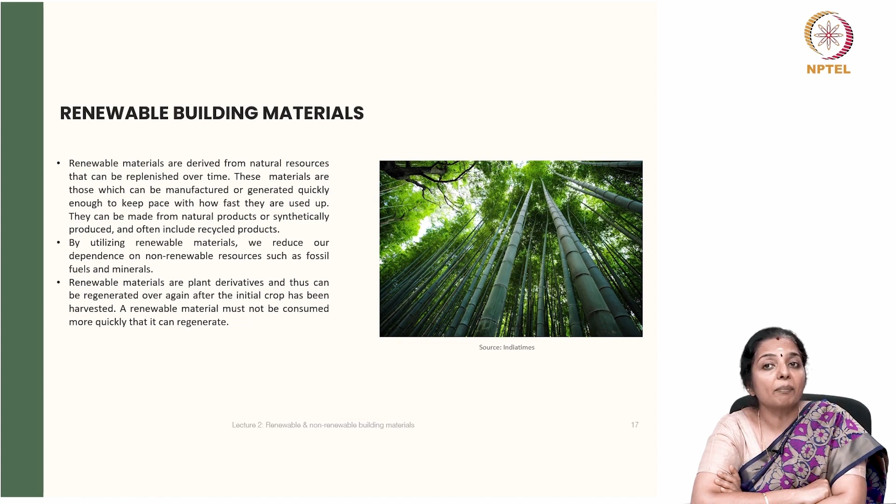Besides being composted in a short period without causing environmental harm, bagasse is used as a biofuel for producing energy and heat along with electricity. These multifaceted benefits pile up its demand in the market.

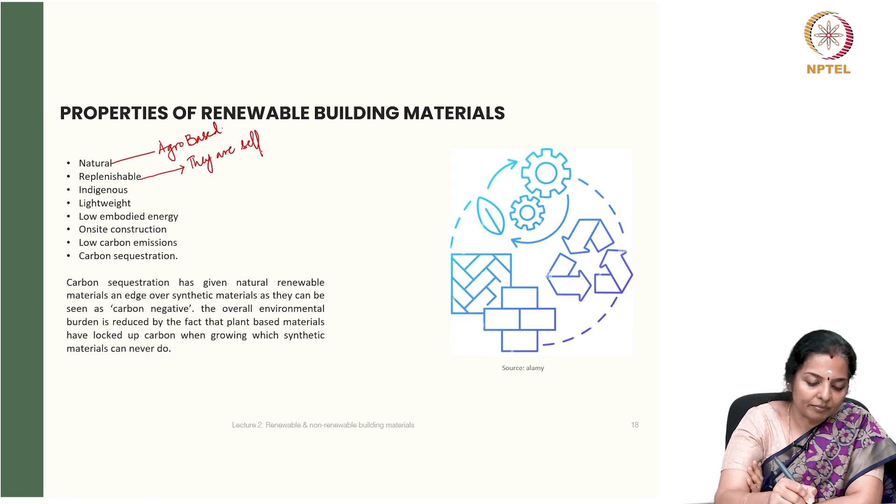Now we will again go through some of the properties of renewable building materials. Renewable materials are natural. Most of them are agro-based. So, they are agro-based most of the times, natural, found in abundance. They are replenishable. So, they are self-generating in a way. For example, bamboo. They are indigenous. So, they have local adaptation

because they are indigenous. They are lightweight because they are mostly made up of dry agro-based material, and they have low embodied energy because they are natural. They are fit for on-site and off-site construction. They have low carbon emissions because they are natural, and they have carbon sequestration again because they are natural products.

So, carbon sequestration has given natural renewable materials an edge over synthetic materials as they can be seen as carbon negative. The overall environmental burden is reduced by the fact that plant-based materials have locked up carbon when growing, which synthetic materials can never do.

Studies on the embodied energy consumption in buildings which have been carried out by UNCHS in the year 1991 have indicated that a high proportion of the energy used, almost up to 90%, is used in the production and transportation of building materials before they are brought to site. Only 10 to 20% of the energy use takes place in the on-site construction process. Thus, renewable materials which are natural have less embodied energy.

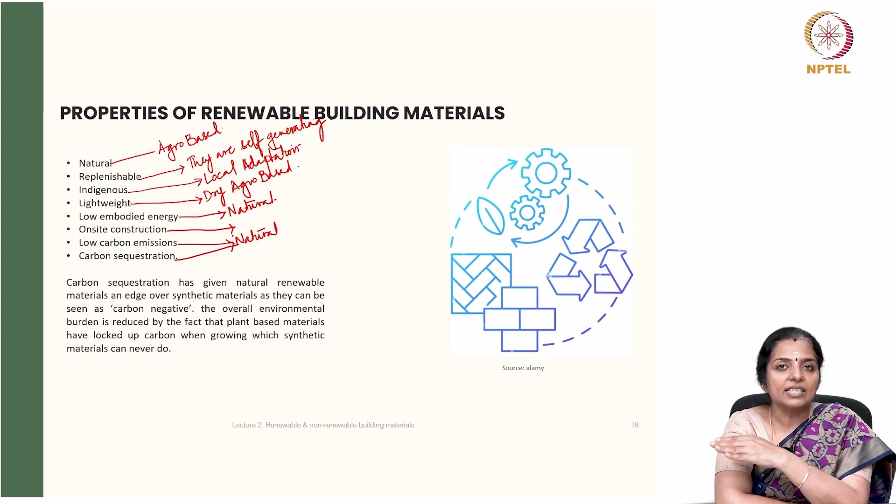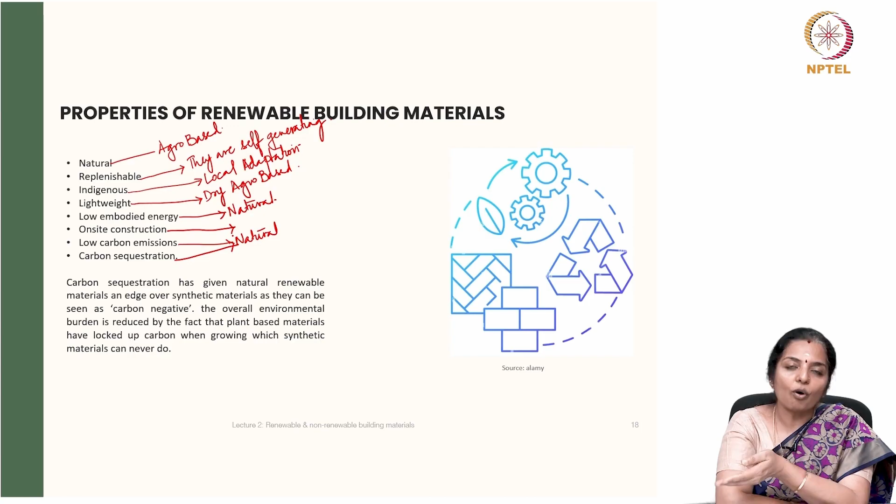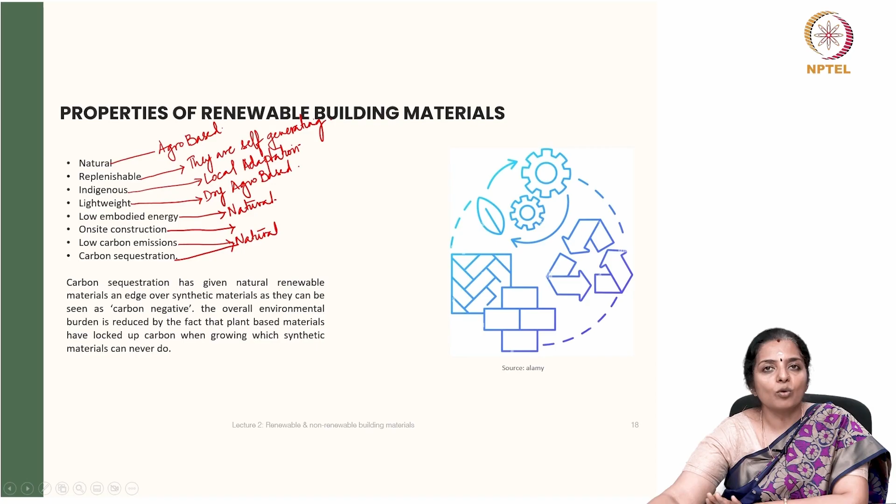In our case, we will also consider mud as a renewable building material since it is a natural material and there is no dearth of mud. If you look at the characteristics and properties of renewable material, mud follows almost all of these except for being, say, lightweight or self-generating. Except for that, it abides by most of the characteristics of renewable building material.

Now, encouraging adoption of renewable material is a very key component in decarbonizing buildings. Recent government regulations encourage adoption of renewable materials. In the mission to transform the construction industry into a sustainable sector, various renewable materials in the construction market have been identified, which hold the potential to replace the existing construction materials. The major objective here is to save energy, water and various non-renewable resources to gain and reap long-term benefits.

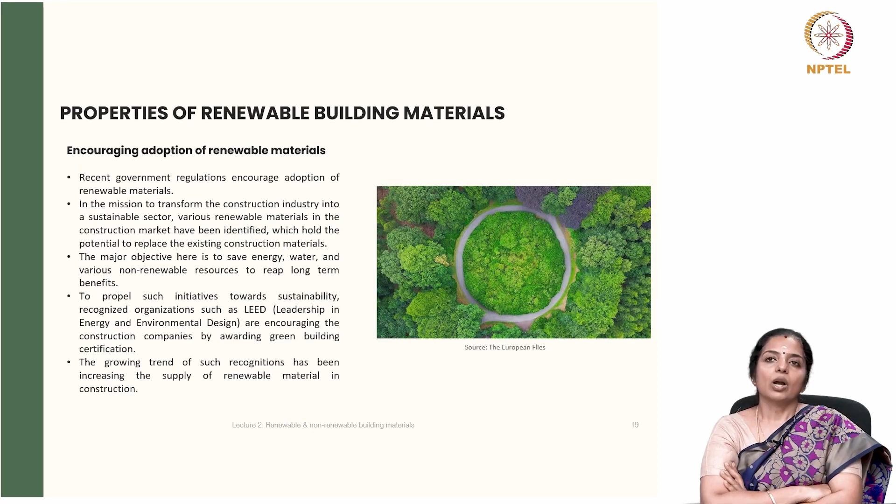In order to propel such initiatives leading to sustainability, recognized organizations such as LEED are encouraging the construction companies by awarding green building certification. Also, the CII, Confederation of Indian Industry, awards green certification to the products itself through GreenPro as an organization. The growing trend of such recognition has been increasing the supply of renewable materials in construction industry.

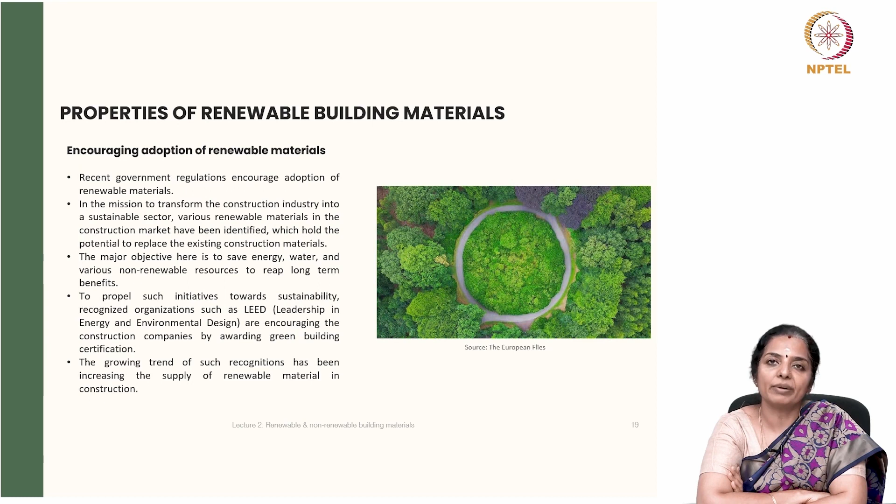Let us now look at a few of the materials and the construction technology which makes the combination of building material used with that particular technology to give rise to low carbon buildings. Let us look at burnt bricks. Now, if you look at burnt brick masonry, per meter cube, burnt brick masonry has 2 to 3.4 gigajoules of embodied energy. Whereas, if you look at composite blocks, it has half or less than half of the embodied energy which a burnt brick masonry possesses, because it has 1 to 1.35.

Burnt brick is manufactured by casting mud blocks and firing them in kilns using certain types of fuels. Sometimes the fuel is just straw, hay. It could be anything. Sometimes it is coal. It could be any of those, and that is what increases or decreases the embodied energy in burnt bricks. If we look at the embodied energy of stabilized mud block, it is almost 1/4 of that of burnt brick.

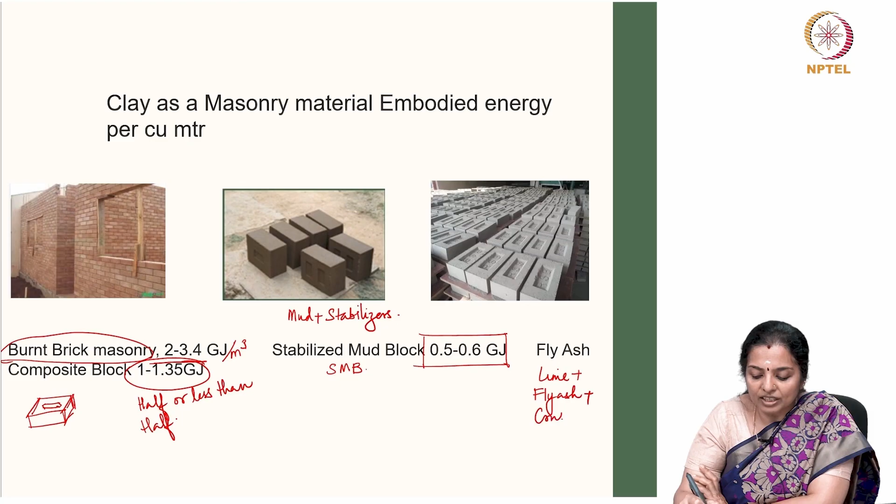Whereas fly ash blocks are a mixture of lime plus fly ash along with crusher dust. This is compacted into a high density block. Now, lime reacts with fly ash and the minerals in the fly ash, forming a water insoluble bond, and that gives strength to the block.

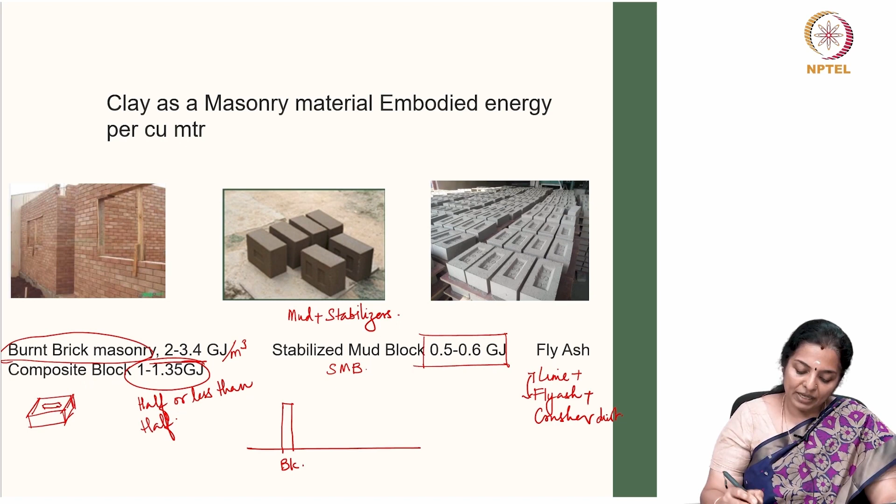So, if the embodied energy of brick masonry is 2 to 3 gigajoules per meter cube, stabilized mud block is 0.5 and fly ash is 1 approximately. So, you can imagine how much reduction in embodied energy can take place by using renewable material or composite renewable material.